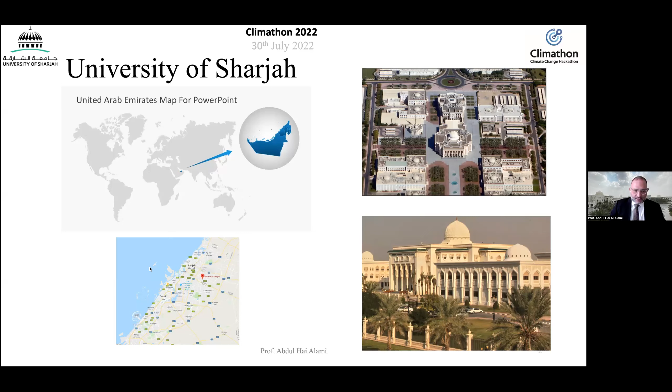Today I would like to speak a little bit with you about energy storage, how it's important, and what is the state of the art currently. We will have to clear a little bit of misconceptions, but first let me tell you where I come from. I'm from the University of Sharjah, as you know, it's in the United Arab Emirates. And it's very close to Dubai, so a lot of you, of course, know where Dubai is.

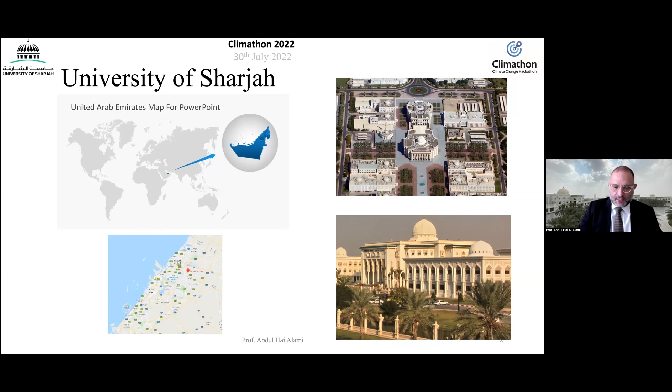And it's one of the biggest universities in the country in terms of size and in terms also of student body. And currently, we are doing a lot of work in terms of research on so many different things, including, of course, energy, which is the department that I come from, the Sustainable and Renewable Energy Engineering Department. And of course, my main area of interest right now is energy storage, and not the conventional energy storage. So why is it important?

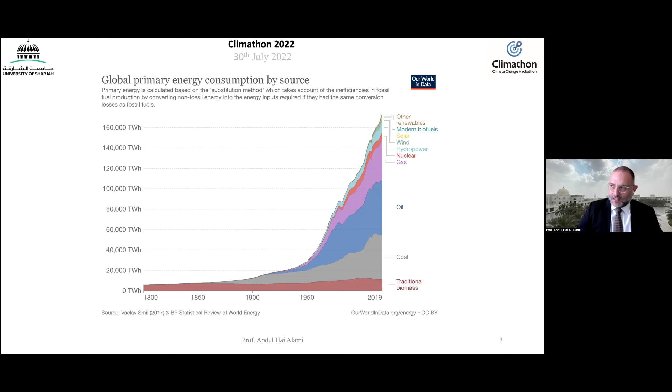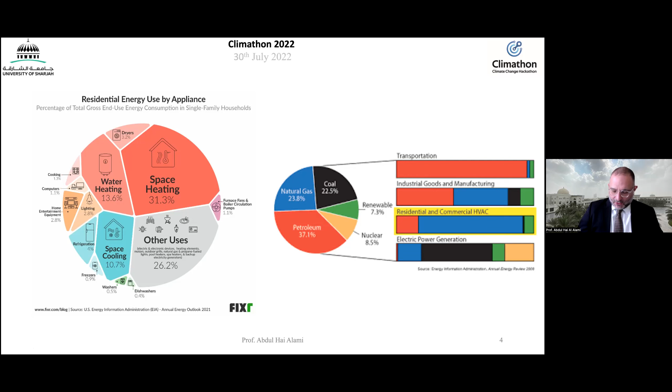You're either heating or cooling. In cooler areas, heating is more important, but in hot areas, like for example the United Arab Emirates, cooling is more important than heating because we have heat almost all the time. And of course, you have to operate your computer and your smartphones and tablets and all of that. So this is where everything is going. And in general, the way that we generate heat, I'm going to focus a little bit on what happens in the Middle East.

This steam turbine, of course, has a double benefit. I can get, for example, water out of that, and also the idea of having external combustion means that if I can replace the combustion with a different source, I can still get the steam that rotates the steam turbine, which also rotates the generator.

So people started to invent solar and nuclear thermal power plants, where I use the heat that is generated by a nuclear reaction to superheat water and get the steam into the power cycle, and then also get the water out of that, in order to provide desalinated water for drinking or for irrigation or for whatever.

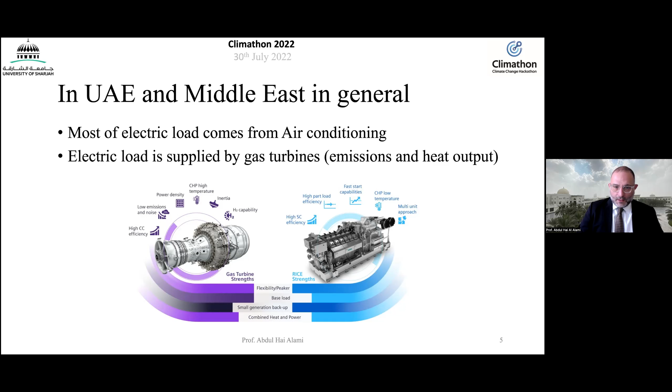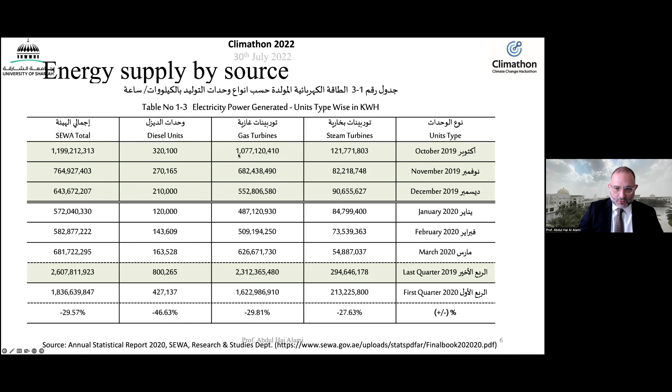The steam turbines are very close to the lower part of this figure, and diesel units also have a lot of issues in terms of emissions and maintenance. But the most dominant supplier is the gas turbines. And as somebody who works in energy, or even if you don't work in energy but you like high efficiency or being conservative, this is not really good, because these are very expensive to operate. Again, the emissions and the heat generated is wasted, unless we have a regenerative cycle.

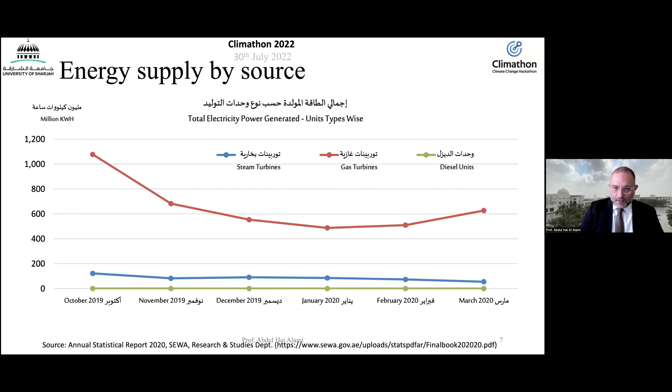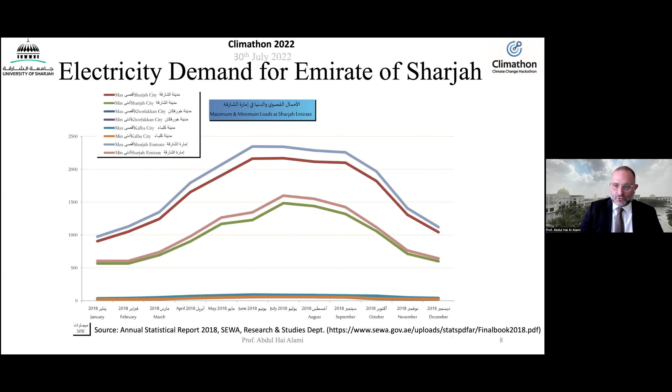So again, the demand is quite high during the summer months because most of the electricity generated has to go to supply air conditioning most probably. Of course, this is again in table form. But this is, of course, not, you may or may not be interested in this.

I hope that all of you went into sleep because I went into lecture mode.

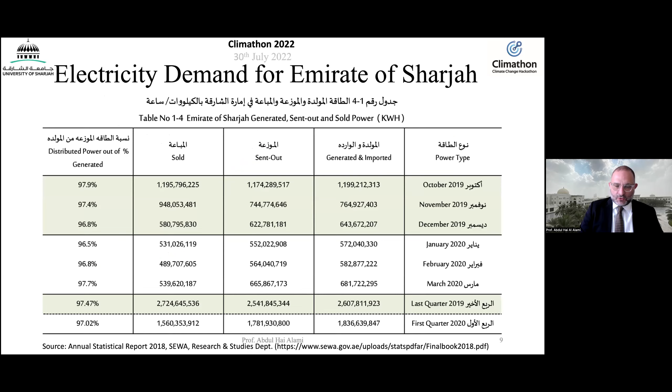Now comes the real question. What is missing from the report and from the statistics that we have seen? We have many ways that we can generate electricity, be it renewable or not renewable. We have fossil fuels, we have gas, we have many resources, and of course, with the changes in the socio-political situation in the whole world, we have all heard about the energy crisis that might actually hit sooner than we thought. So we really have to start to think about making use of all of the energy that we have to try to make sure that we're able to store it.

Okay, so in the report, and this is just one quick example from a country that has a lot of energy resources, be it in terms of, for example, the fossil fuels. We have a lot of gas, we have a lot of petrol, we have a lot of sun, if you want to think about it in terms of renewable. So what is really missing from this report is actually the provision to store. Nobody talks about storage. Nobody talks about what if, all of a sudden, we have a certain situation that requires no access, for example, to external energy sources, and we have to rely on what we have stored. Are we ready or not?

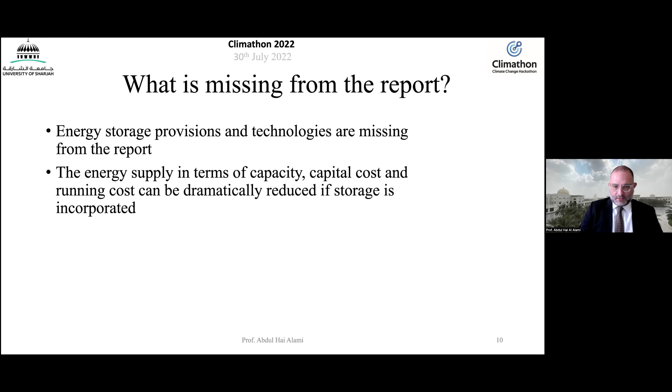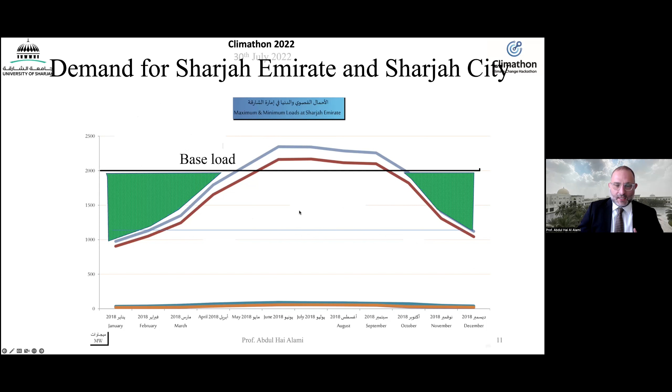The electrochemical storage includes batteries, like you mentioned, but batteries are only one tiny fraction of the available technologies for energy storage. Batteries include lead-acid batteries, the old ones, lithium-ion batteries that power Tesla cars, for example, and flow batteries, the big batteries, for example sodium-sulfur batteries, the NaS batteries. We also have capacitors and supercapacitors. These are also electrochemical systems because I have an active chemical material connected through an external circuit, and this is what makes the electrochemical system operate.

Why are batteries this popular? Why, whenever we say storage, does only one person say something other than batteries? Again, they're small, they're compact, they're easy to use, and they're available. What we need to do whenever we think about how to store energy is also look at the source at which the energy is generated or converted, because converting energy from one form to the other always creates losses. So if I have a certain amount of electrical energy and I want to store it in batteries, some of this energy is going to be lost.

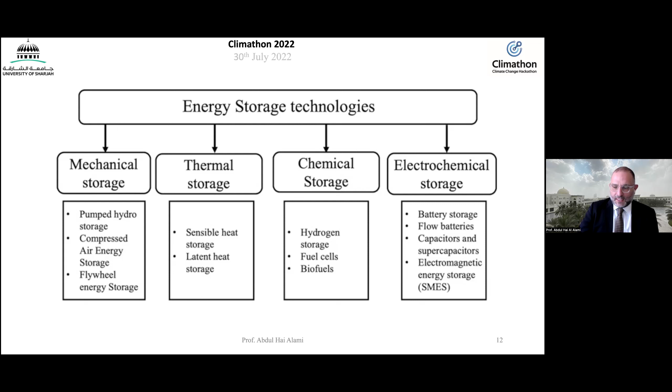We also have mechanical storage technologies like pumped hydro, and I think this is what our colleague mentioned, the hydraulic head, which is called pumped hydro. I'm going to talk about it a little bit. We also have flywheels, and compressed air energy storage, which I'm going to focus on a little extra today. As you have heard, there's the National Renewable Energy Laboratory, or NREL.

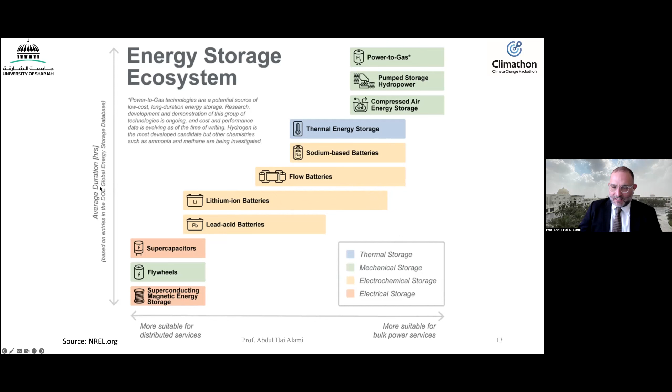And let me just go back to the slide. The lines that go all the way to the right mean something. For example, lead-acid batteries cannot reach the bulk storage as much as lithium-ion batteries. And since lithium-ion is on top of lead-acid batteries, which are the conventional batteries, this means it can give us a longer charge and discharge cycle. So this is what we're looking for over here.

So the main two technologies that I will be covering today are pumped hydro and compressed air energy storage for large scale energy storage. That's number one. And number two, things that are not batteries. In my humble opinion, batteries will remain important and remain with us, because if you want to charge your phone, you cannot build a pumped hydro storage station with a big dam and a lot of water next to your house or in your car.

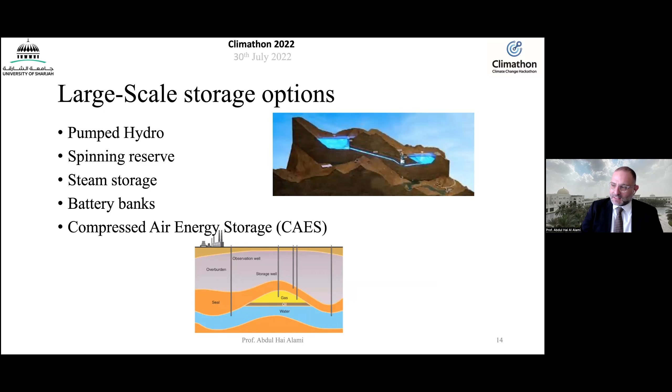Okay, we'll still need batteries for certain applications, but at the same time, it's not going to be the win-all or the go-to solution all the time. So pumped hydro storage is, of course, storing the energy. And I'm just going to use the schematic. I hope that you can see my mouse.

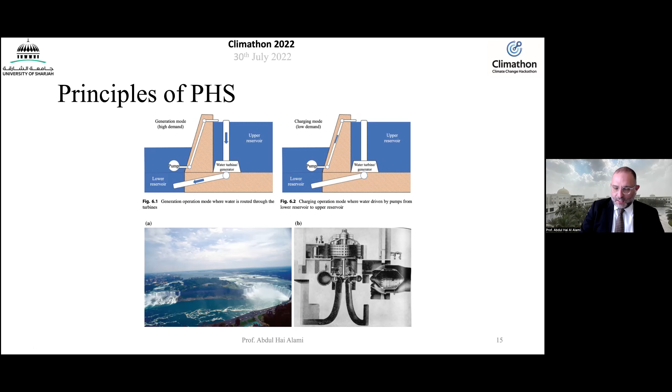So generation means that I'm allowing the water to go from the upper reservoir into the lower reservoir through the water turbine that rotates the generator, and the generator rotates and gives me electricity. Okay, the pumping part where I'm giving the system energy, and this happens if you remember the curve that we just showed you.

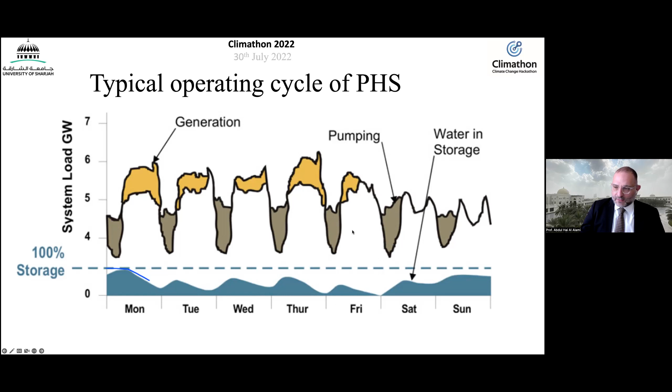So what if the country does not have rivers? Sometimes you have a very mountainous area. So this is a very ambitious project that is taking place currently in Dubai, in the United Arab Emirates. Dubai is very close, of course, to Sharjah.

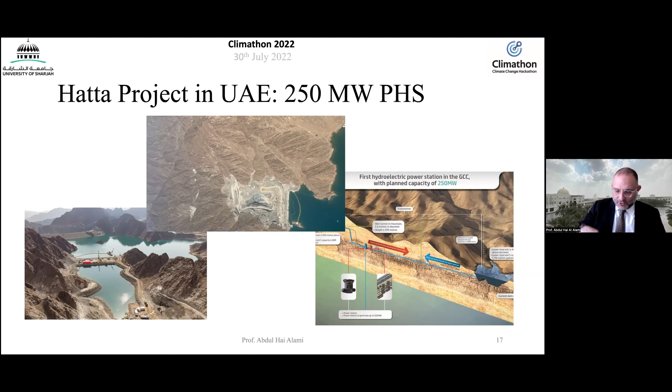Sometimes they have more energy than they need, so they route it to the Hatta. They call it the Hatta pumped hydro storage power plant, and they use, of course, the electricity that's generated from the PV, which is renewable, to pump the water into the upper reservoir, and then whenever you need energy or you are working in peak conditions, you can start to allow the water to go down, and then you have the generation. So this is the generation section.

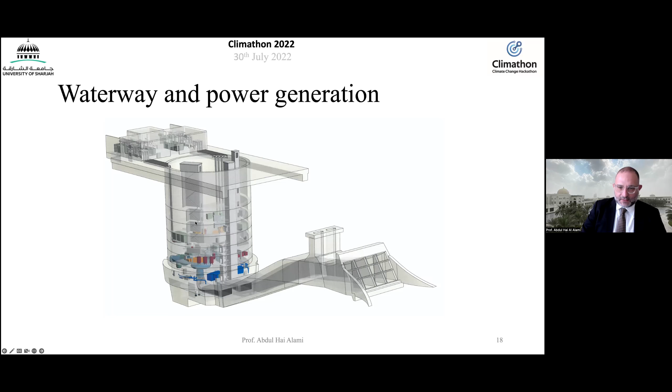and then you allow the water to go back into the lower reservoir to be pumped, of course, back again, and then we get the electricity and we distribute this electricity. Okay. So this is one large-scale solution that is not a battery.

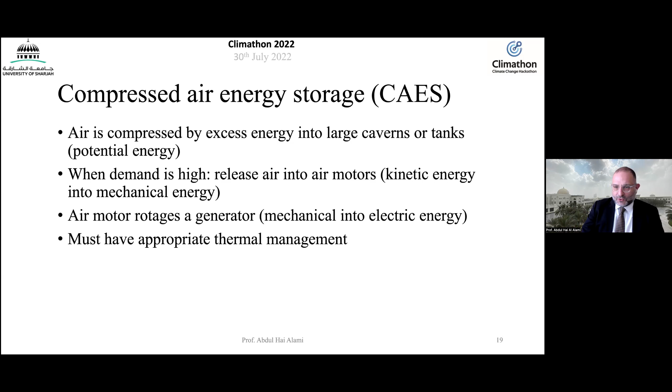So this is the kinetic energy from the air into, of course, mechanical energy in this wheel. And then I connect this wheel to a generator again. So I have rotation from the wheel. The generator rotates, and then I get my electricity from that generator. Okay. If you want to read on this, one of the important things that I need to do is, of course, to thermally manage this. We're going to talk about that in a second.

So why do we need to have thermal management? Of course, this is what I was just explaining. We have extra power. We operate a compressor. And as you know, the more I compress, the higher the temperature. So here I have to have a provision.

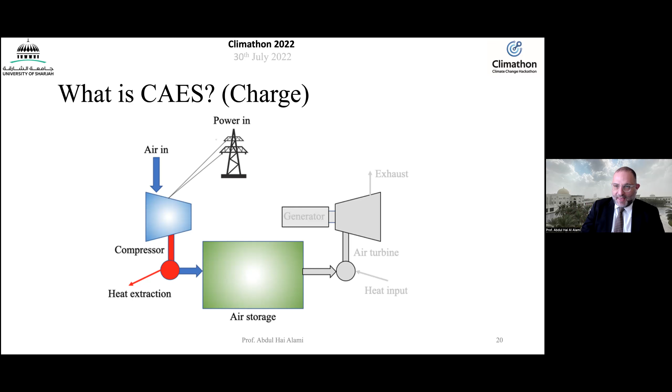I need to think about how I can get the heat out of the air so that it would be stored underground or in a big tank. And then, of course, this is the charging part where I need to store the power. I have excess power. So if I stop having the power, and I need to give the power back to the grid, I allow air to go into that turbine. Of course, here I need to give the heat back to the air.

If you're thinking why, if you've ever used an aerosol, for example, air freshener, insect killer, or deodorant, once you press on that button a little bit and you touch the nozzle, you feel that it's getting cold. So we don't want that air to be too cold that it would start to condense the vapor in the air into droplets of water. This air turbine has blades, and I don't want these blades to hit anything other than a gas. If they hit liquid, they would be damaged. So I don't want this damage to happen.

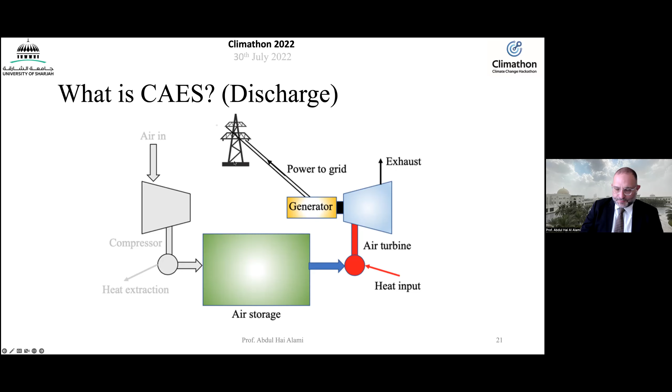So I give the heat back, and this heats the air to an appropriate temperature, and then the air goes back into exhaust while I'm rotating that generator, and they give the energy back to the grid. So this is, again, the basic idea. It's much different than pumped hydro storage, of course, because here I'm working with what is known as a compressible fluid. Of course, water is not compressible. So there I can apply, for example, Bernoulli's equation.

I'm not sure if most of you are interested in engineering, but Bernoulli is a very simple equation that gives me all of the powers that are affecting a certain fluid, be it weight, be it pressure, or even the velocity. I cannot apply those equations, but I can apply what is known as the isentropic relations that are derived from the ideal gas law. I'm not going to bore you too much with math, but this slide in particular comes from NASA's website. I usually keep the NASA logo.

So if you're interested, you can just look up the isentropic relations on the NASA website. It has so many different slides for different courses, like heat transfer and fluids. It's a very useful, free site. So you can go there and get all of the relationships that govern pressure and temperature, and of course, the type of fluid that you're using. In our case, we're using air. So the specific heat ratio, or gamma, for air is 1.4. So you can do the system design and get the most out of your compressed air system.

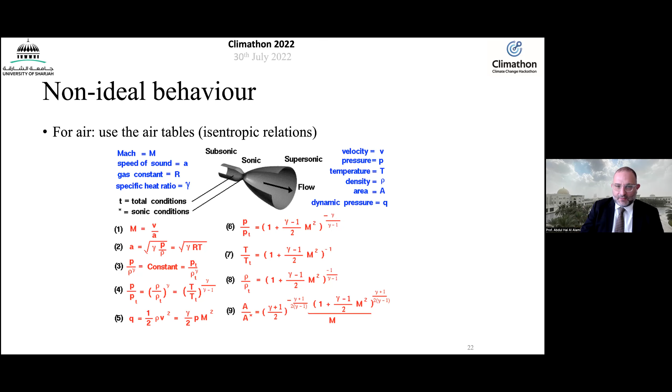We previously mentioned that compressed air energy storage systems are arranged by how I manage the heat. If I don't care about the heat, where it goes and where it comes from, like I don't have any heat exchangers, they call it a diabatic system. And this is not derived from diabetes, which I have by coincidence. It's not the disease. Diabatic, not diabetic. Diabatic means no care for heat storage or heat management. While in adiabatic systems, I either have dedicated thermal energy storage, TES, or I don't, but I still manage the heat. With TES means dedicated thermal storage; without TES is if I don't have dedicated heat exchangers for this purpose.

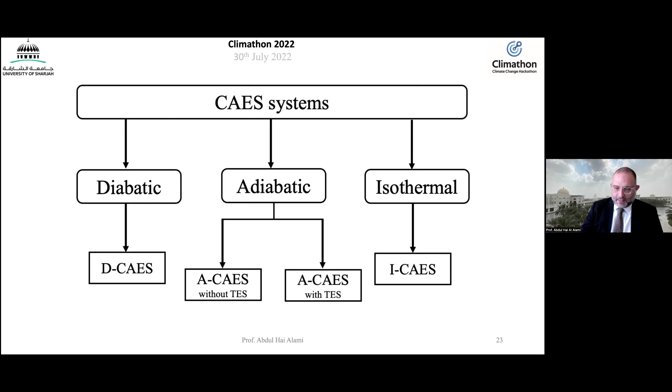Isothermal compressed air energy systems are the latest, and they're still in experiment. People are still experimenting with them, where I increase the pressure very slowly in very small steps. They call them pseudo equilibrium steps, in order not to raise or decrease the temperature very suddenly. So all of these are viable models that I can use, but you have to specify what you're doing with the heat. It's very important. Again, I promise not to bore you with math, but this is where it all comes from.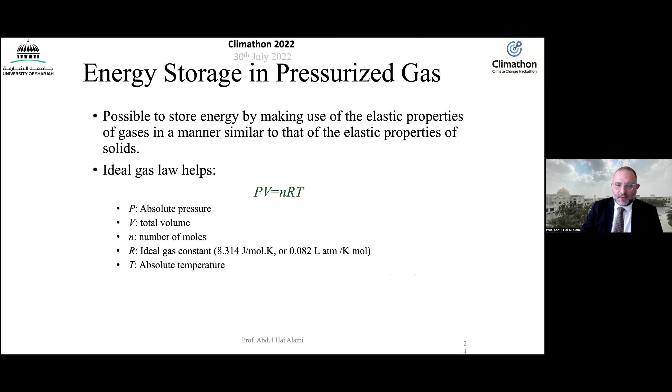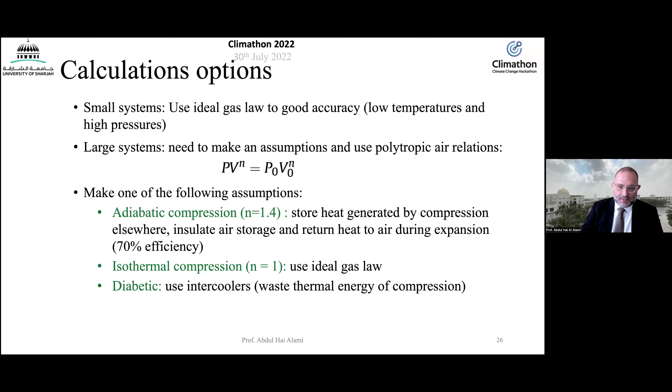This is the ideal gas law. We know it from physics: PV equals nRT. And of course, air does not behave as an ideal gas. So I have to modify it a little bit and go into the isentropic or the polytropic model, which works very well for air, where PV to the power n is a constant value. So I can calculate all of the pressures and temperatures that I need, and I can also calculate the theoretical efficiency, which can be as high as maybe 60 or 70%, depending on the pressure.

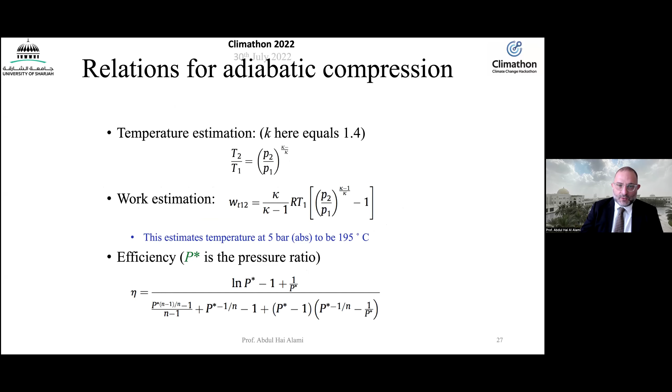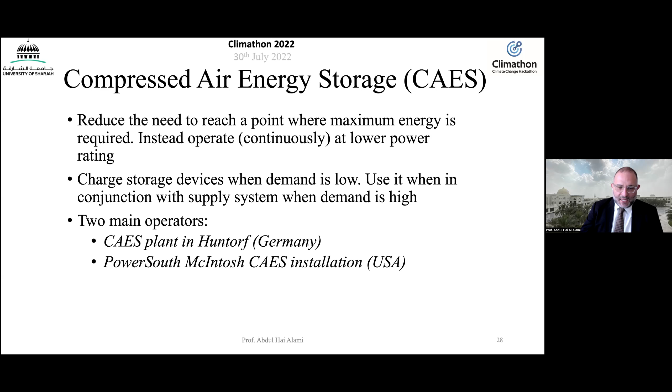But of course, as you know, here I have emissions, I have heat that I have to work with. So again, this is not as renewable as you want it to be, but at the same time, this would definitely satisfy the demand for electricity without having to buy a gas turbine, because I already have the compression in the air storage. And of course, this air storage can either be a tank, but in the case of the McIntosh power installation, they have a salt mine.

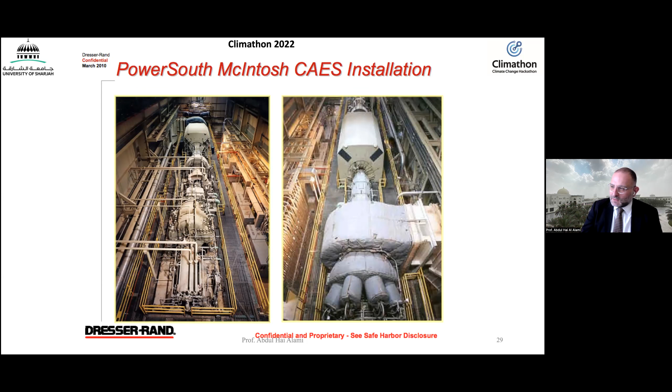I have a question. Do we need to heat up the gas before the turbine? The answer is yes. Because otherwise you're going to get to very low temperatures, and if you have moisture in the air, you're going to get condensation, and this condensation is going to turn that vapor into liquid droplets. And as the turbine is rotating, it's going to start to hit these droplets, and you'll damage your hardware. And you don't want this to happen. So thermal management, again, is very important.

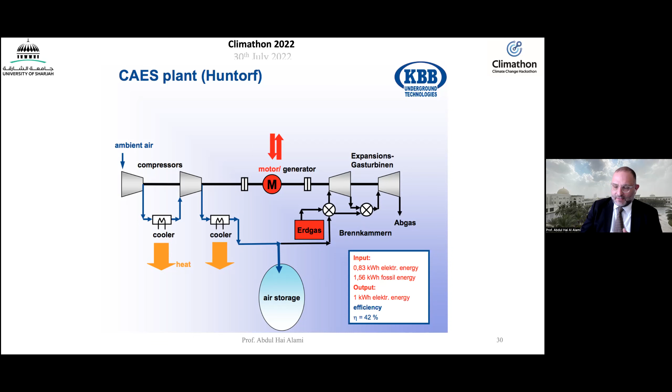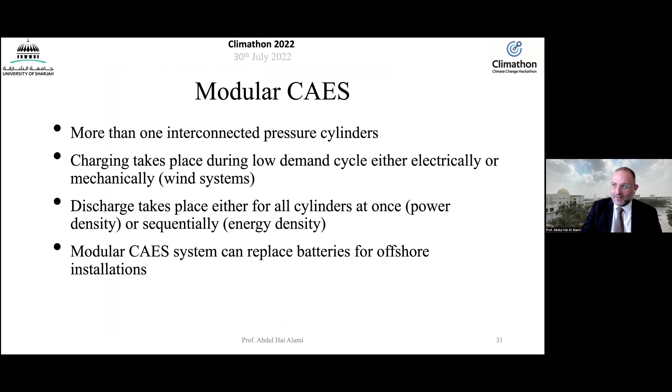So you fill these tanks, and then you connect them with automatic solenoids. These solenoids open and close according to our programming, and then this goes into the air turbine, and we get the electricity generated. And we can operate this either sequentially, or together. If we open the three solenoids, we're going to have a lot of power and we're going to rotate the air turbine for a short time. While if I don't need a lot of energy in a very short period of time, then I can allow each of these cylinders to decompress one by one.

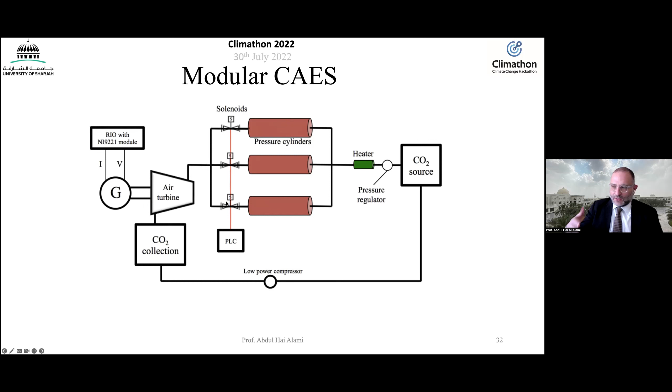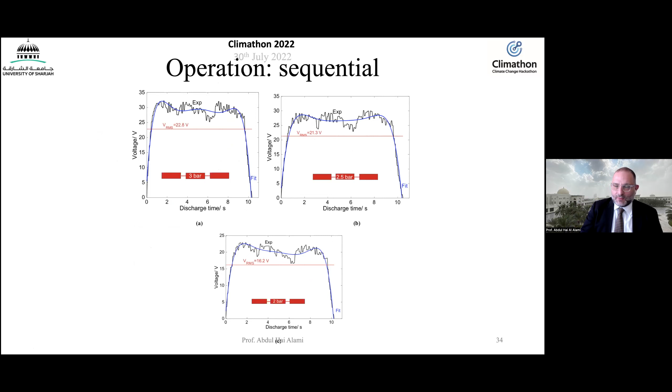And this is, of course, the voltage that we're getting from all of the 3 operating at the same time at different pressures. And this is what we get from each of the tanks discharging at the same time. And again, before I leave you, because I don't have that much time left, we can have as many tanks as you want, because these tanks are very small. Let me show you very quickly one last slide, and then I'm gonna stop here.

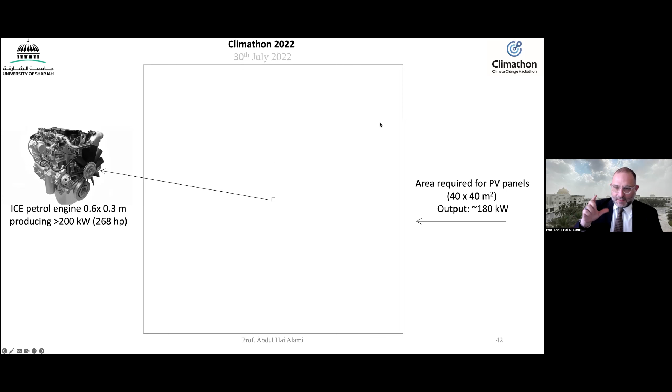Okay, so if you tell me that maybe a small battery that is this big is going to replace what I'm proposing, which is like a big space to store air in, I can refer you to the previous drawing, and I can tell you, if there is a will, there is a way. If you want to go renewable, or if you want to think outside of the box, then you have to, of course, pay the price.